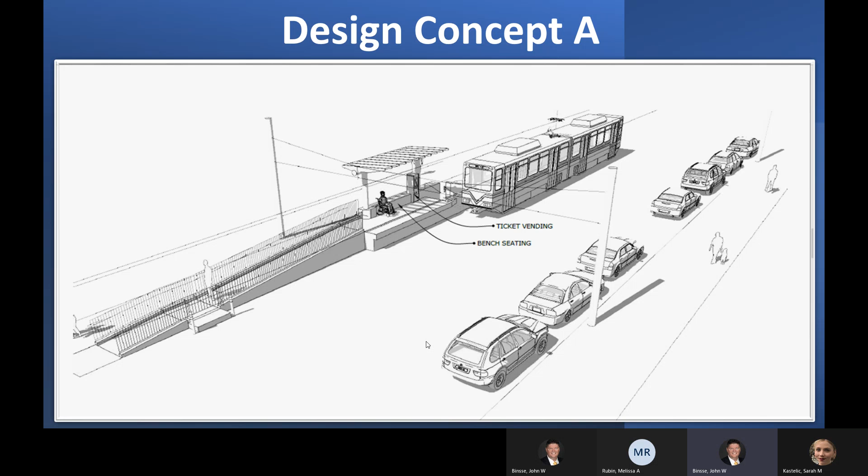However, if there's some simple architecture the community would like to see to tie the station into its surroundings, we would be excited to collaborate on that initiative. An accessible ramp with a bus height boarding platform when rail service has been interrupted. This will easily be facilitated by a swinging gate that will block entrance to the platform while rail service has been interrupted. There will be steps for those that wish to use them or find them more convenient. A ticket vending machine, bench seating, and digital signage indicating real-time system information.

As we move on, I'll refer to this as Design Concept B. It is more compact, and the ramp wraps around the platform. This design lessens the overall footprint of the station, reducing the impact on parking. If bike lanes are a consideration, future modifications to the city's infrastructure will be required.

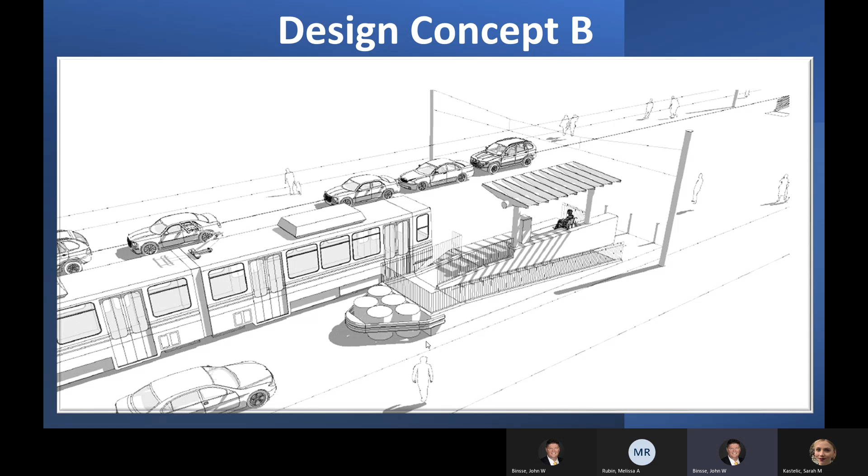From here forward, we will talk about the exact locations where the station could be located. This is an aerial view of the compact Design Concept B flat platform on the outbound side of Belasco, in front of St. Catherine's. The blue triangle represents the sight distance triangle, indicating how far back from the intersection it must be set to comply with safety standards.

As you can see, the platform is set back from the intersection significantly further than the existing platform near the crosswalk. This orientation is not ideal for many reasons, including pedestrian access to the crosswalks in the immediate vicinity of the platform. Design Concept A, the long platform, can also be placed in a similar location.

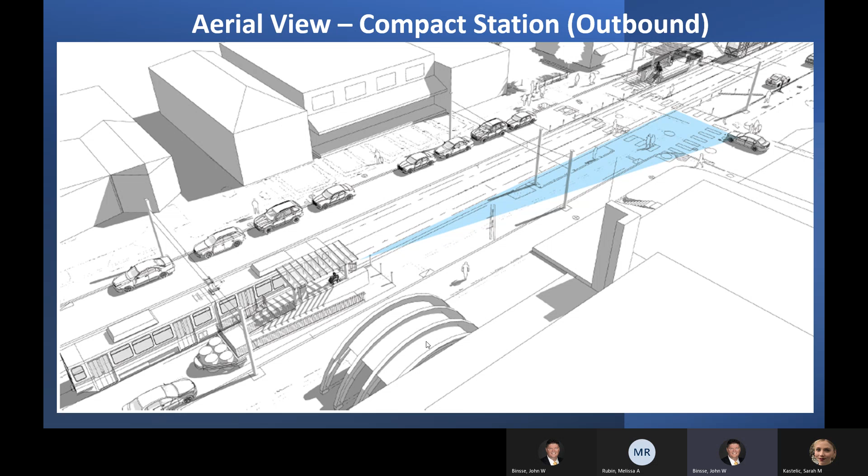Here is an alternative to previous placements. However, it requires changes that we will need feedback on. If the neighborhood is agreeable to making Belasco a one-way street, and under careful analysis of design standards and codes, we may be able to move the platform closer to its existing location, where the low platform currently is, or to the other side of the intersection, as shown here.

In this layout, the church is to the left. The compact design concept B is on the inbound side of Belasco rather than in its existing location on the outbound side. Once again, in this placement, either A or B will work.

However, the long platform will reduce parking capacity, most likely losing 2 to 3 parking spots directly in front of several homes that have no access to off-street parking. The major modification required at this placement obviously is making Belasco a one-way street away from Broadway Avenue.

I want to emphasize that we cannot place a new platform in the existing location or the displayed location without making Belasco a one-way street. There is no sight distance, which means vehicles will never be able to safely exit Belasco onto Broadway. Without Belasco becoming a one-way street, either the station cannot be built, must be constructed mid-block in front of homes, or it must go directly in front of the church.

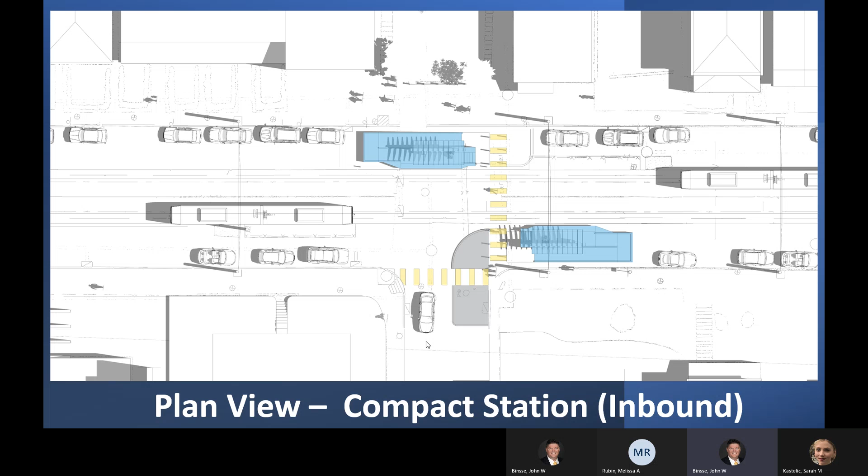The current orientation shows the stations in the areas that were previously slip lanes but are now future potential sites for public art. There is little to no impact on parking, and at this point does not appear to be in front of a home or business.

This is an additional view of the compact stations on the inbound and outbound side, showing the stations in 3 dimensions. Parking is gained in front of the church, and none is lost on the other side of the street. The outbound platform occupies a portion of the intersection where Belasco continues on paper and is currently occupied only by utilities.

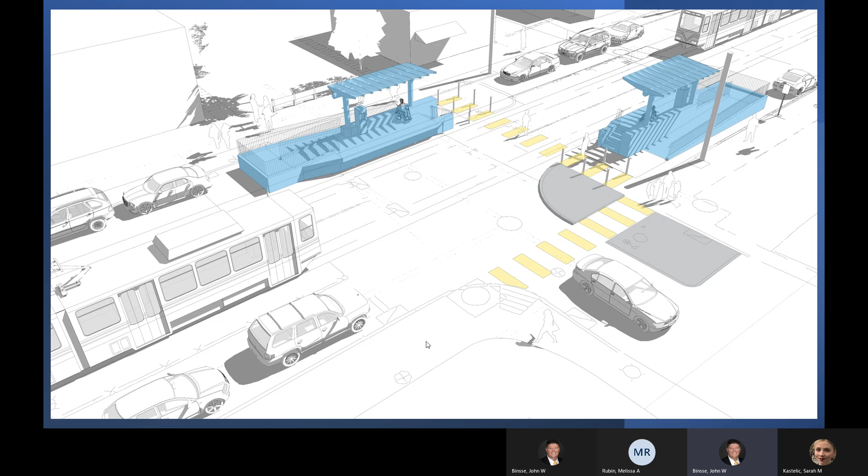The last view here shows the outbound perspective with regards to church access and street parking.

I've shown you a few design concepts and placements. We have gone through rigorous analysis up to this point, eliminating options that did not meet guidelines and code. Now we move on to our next steps.

Our first goal is to collect input from the public and determine which concept works best. We will then move towards finalizing the design, which we expect to have complete in the spring of 2021.

Currently, there is no funding for construction, and unfortunately, we cannot establish a timeline for construction at this point. When construction funding has been secured, we will develop a timeline and reach out to the community to collaborate on construction.